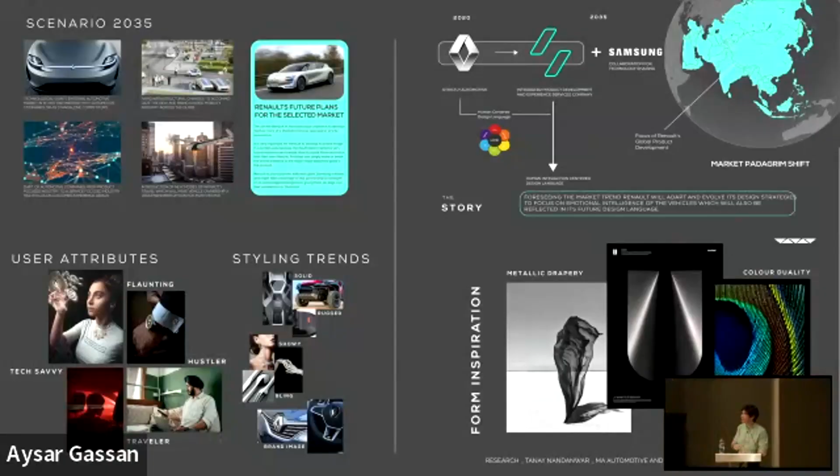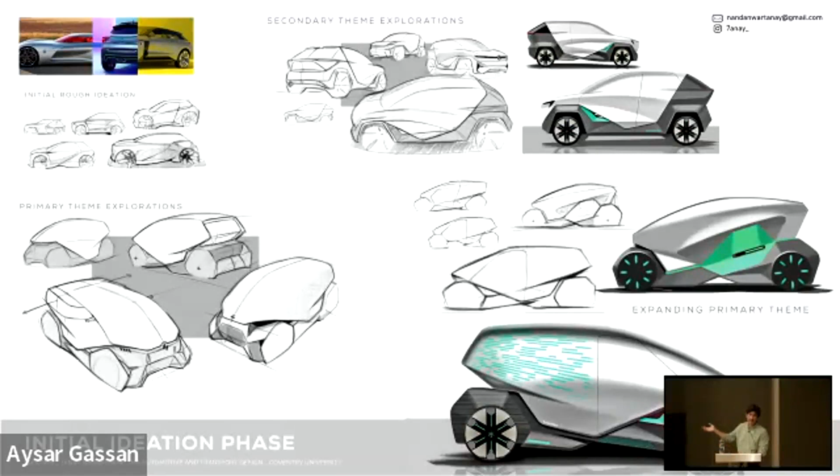Then developing those themes further, slightly more developed renders or illustrations, renderings we call them. A little bit more colour, a little bit more details associated with them. Some orthographic views, just really trying to hone the design a little bit more.

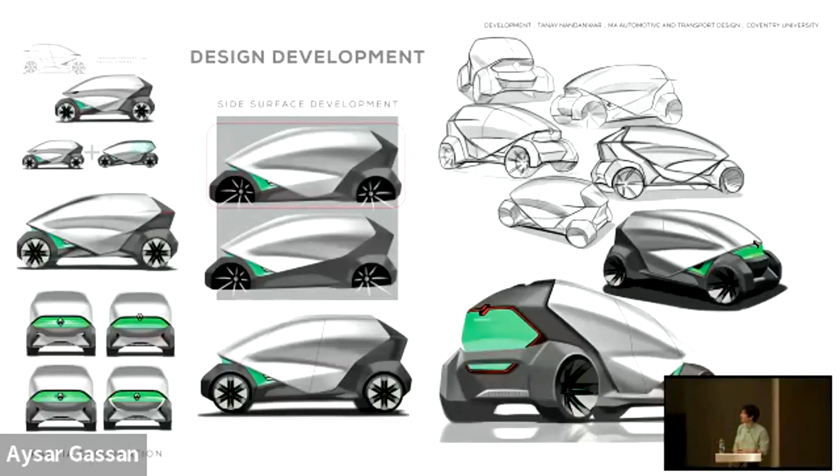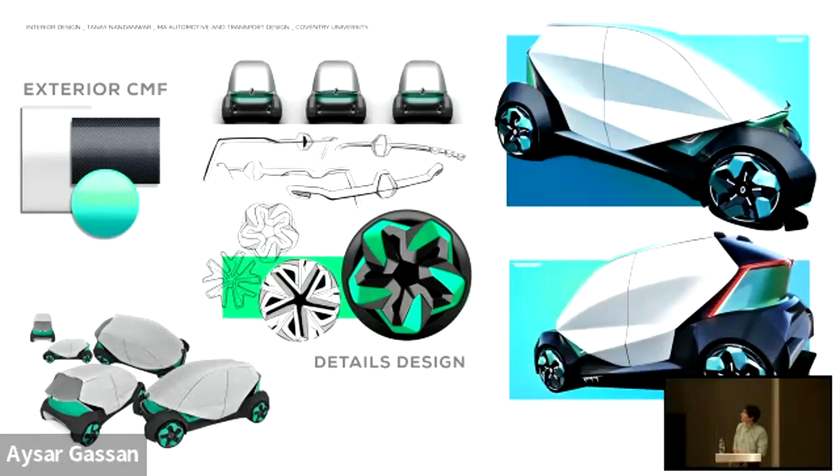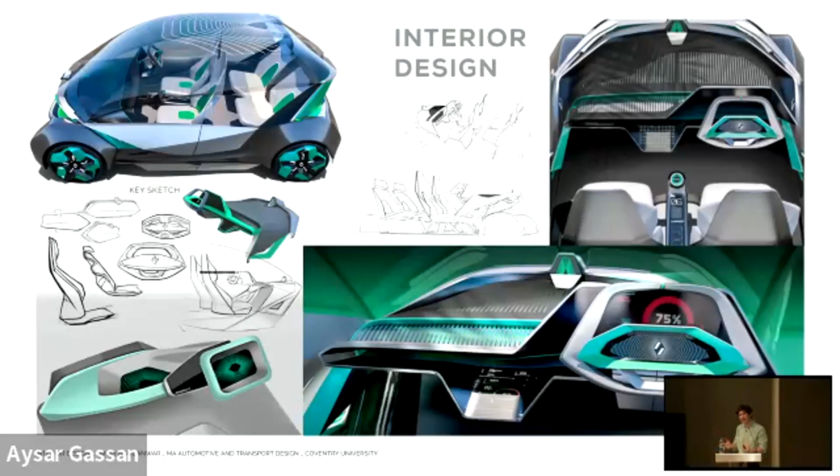Then some design details. Here we've got wheels. There's loads and loads of details, but just on this page, wheels. A little bit more complete renders with the wheels attached. Then some interior design, and there would have been a lot of work going into this interior. This is just a page, but there would have been hours and hours going into it to get to this stage. And this is a little bit of ergonomics work.

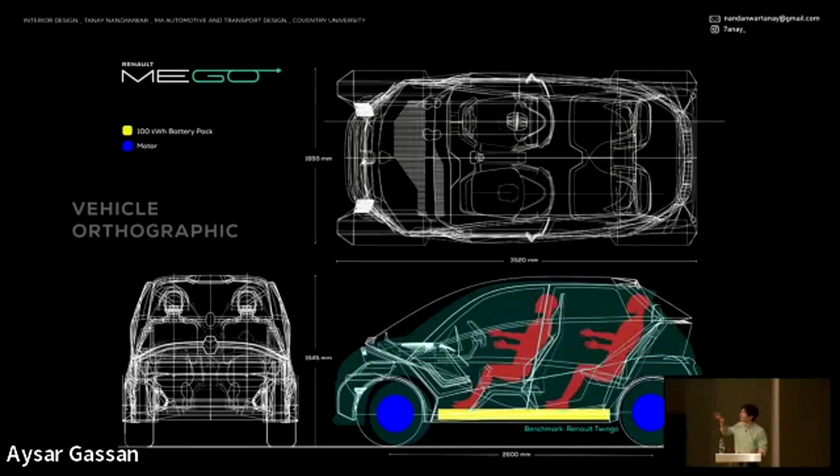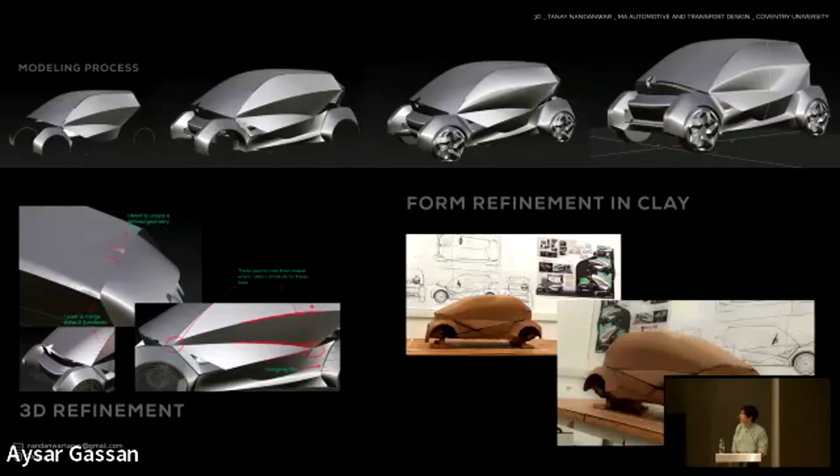And up here we've got CAD images, the development of CAD images, a little bit of clay work to kind of tease out some proportions with the clay, the automotive clay. And then jumping a step ahead, we've got some kind of photorealistic CAD work. So this is a CAD image rendered in a photorealistic scenario.

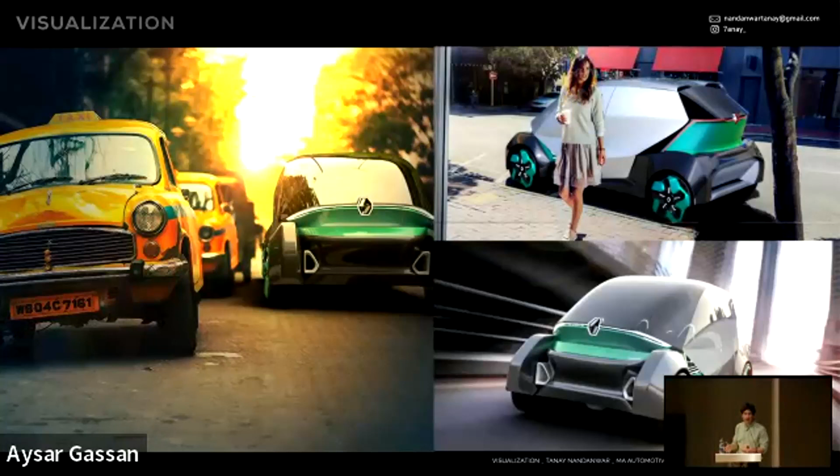And from there, we can see the vehicle in context, how it sits on the road, how it sits next to other vehicles, etc. And that's really important. It gives us a little bit of colour, a little bit of extra feeling to the illustration, to the rendering.

Another graduate, this is Tom Zier, and he's recently started working for a company called Ola, based in the Midlands. Well, they're actually an Indian company, but they've got a design studio in the Midlands. And he's here designing a race car. Again, starting with inspiration images, quite rough sketches, looking at a kind of a package, different views. Top view, we call it a plan view, the side view, etc.

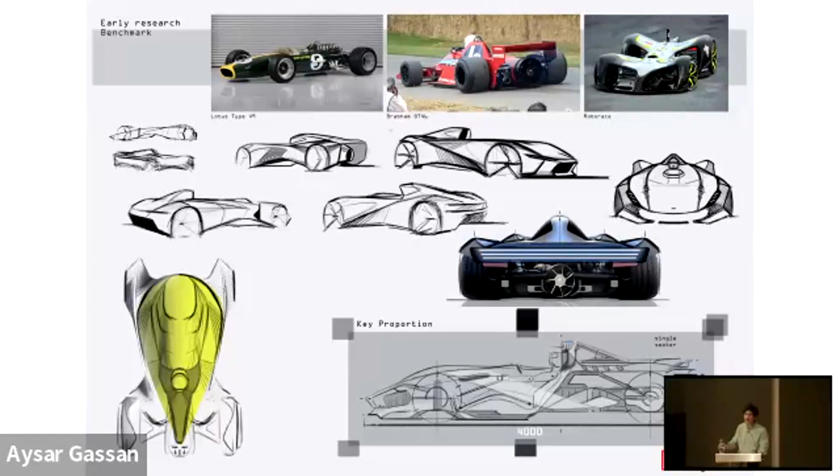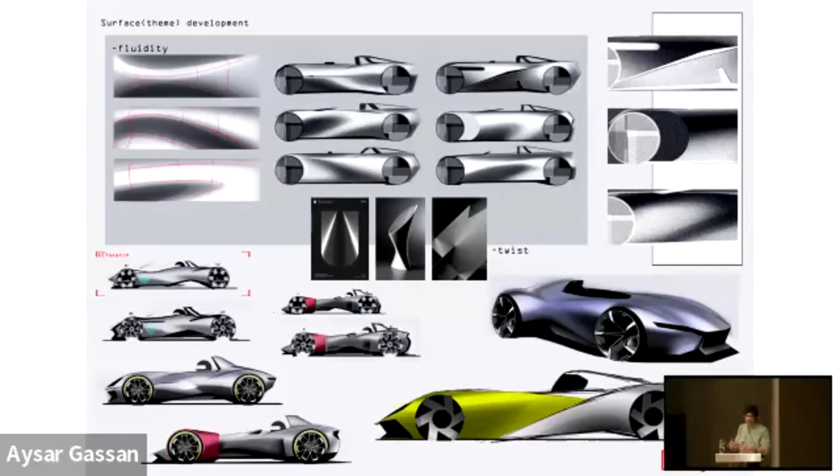Design directions, more side views, front three-quarter renderings, just trying to hone the design more, and looking at the shape and the proportions of the vehicle. Now here, Tom has gone into 3D CAD, and he's got his surfaces there.

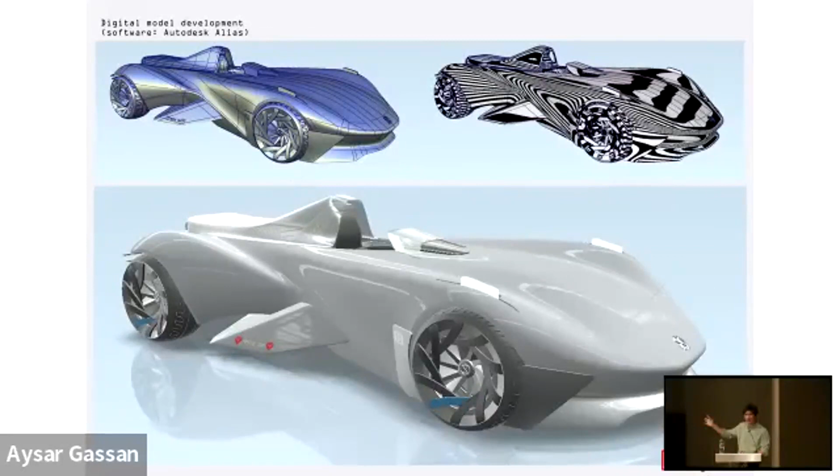He's inspecting his surfaces in the top left and right images, and there we're looking at how the reflections work, whether the design has curvature, which means that there's a smoothness, a slickness among the surfaces that allow the reflections to really flow. And then there's a sketch illustration, a sketch render at the bottom there. Then a little bit later, there's more developed renderings of this design.

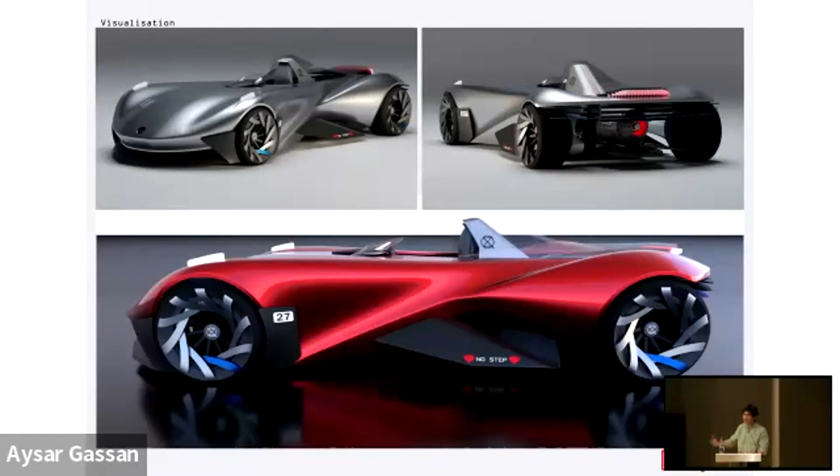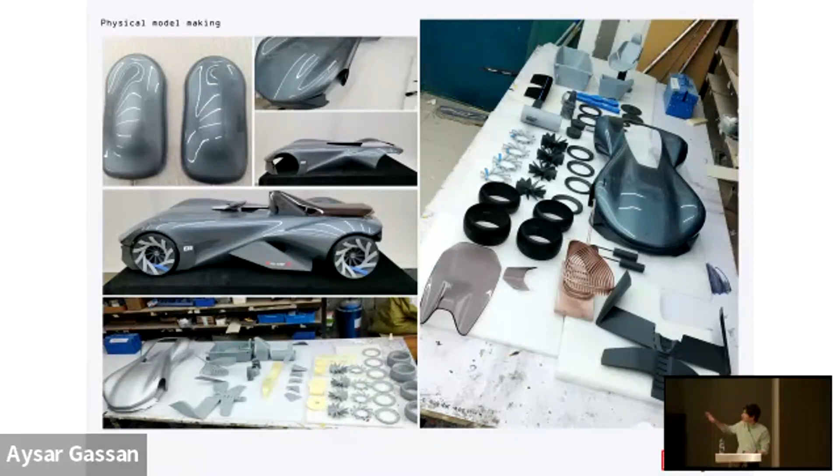So that's another young designer who's using this kind of process in order to get to their design result. Tom then used the data from the CAD file to prototype this design, the exterior, the detailing, and then put it all together, and there you've got the photos from the final design, which is really, really impressive.

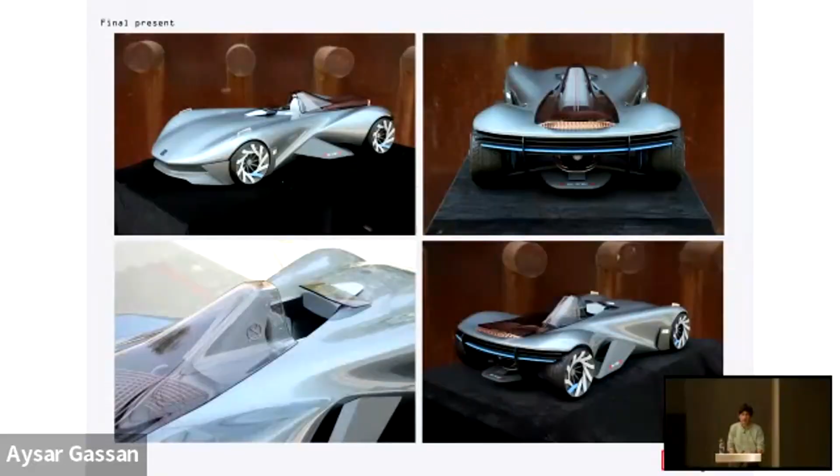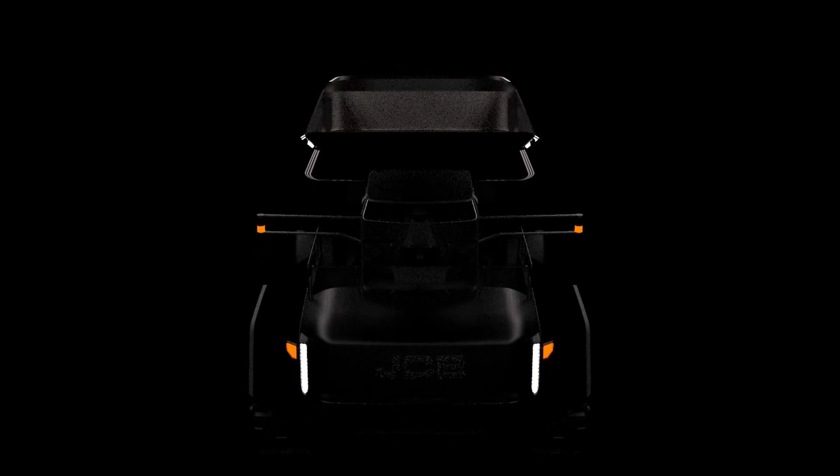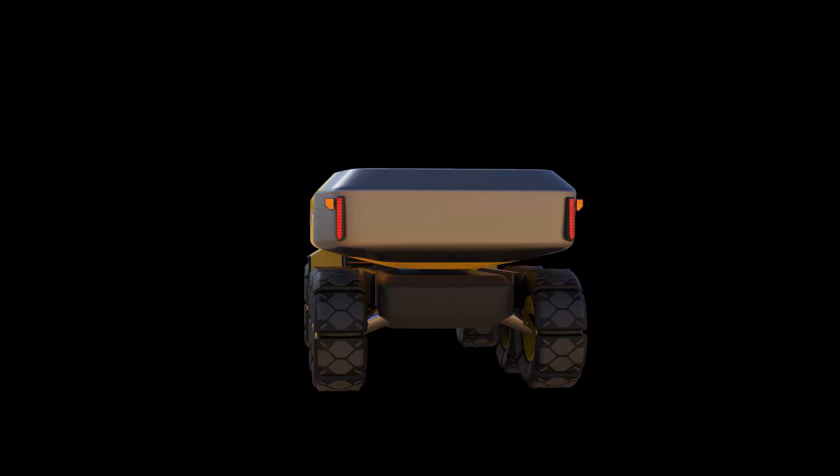So this is a 60-ton dump truck, and you can see the tipping action is shown here for the dump truck. Again, it takes a static design, and it gives us a little bit more realism associated with it.

Okay, so just to summarise for now, some of the careers that are available in automotive and transport design are user or market research, looking at the future, looking at demographics, looking at trends, and then exterior design, which is obviously the outside of the vehicle, the interior design, looking at component and detailing.

There are opportunities available for designers who solely specialise in detailing, like lighting, because lighting is so complicated now. It's so competitive. So there's opportunities available with lighting.

There's colour, material and finish designers, and they specialise in the types of materials that we find, often on the interior, and the colours and the fabrics and the different trim levels that we have, from more basic models to sport to luxury to more expensive models. Then there's digital interface designers, and they'll be looking at what we call the user interface of the digital screens in the vehicle.

So here you can see the beautiful timber floor, beautiful refined detailing, architectural roof. You can see how refined it is, beautiful lighting. So obviously there's no driver, so why not have a luxury experience in your vehicle, chatting away, reading a newspaper, perhaps purchasing some Bitcoin. Who knows what people will be doing. And you can see this going from a five-star hotel to the airport, etc. A contemporary of, but totally different to, the GAC Moca.

So if we move on to the final concept, which is the most recent concept, launched I believe earlier last month, the Citroën Oli. This concept rethinks mobility and looks at sustainability in terms of we've got loads, we consume loads, we throw away loads, and its strapline is enough, like enough is enough.

And how can we reuse, how can we slim down the amount of materials in a vehicle? How can we slow down? So this vehicle is limited, the speed is limited I think to either 58 or 68 miles per hour, I can't remember, but it's totally limited. It's about getting somewhere slowly. It's about really having a different experience and relationship with your vehicle than you do now, not hurrying around.

So this seat, for example, there's only three materials used in these seats to make them lighter, to make them easier to recycle. So some real thought leadership there from Citroën. So you can see the three different concepts, three very different concepts, but all looking at future ways that we might be using or interacting with, and relationships, debates, discussions with our cars. So some questions really in terms of where the future of mobility might take us.

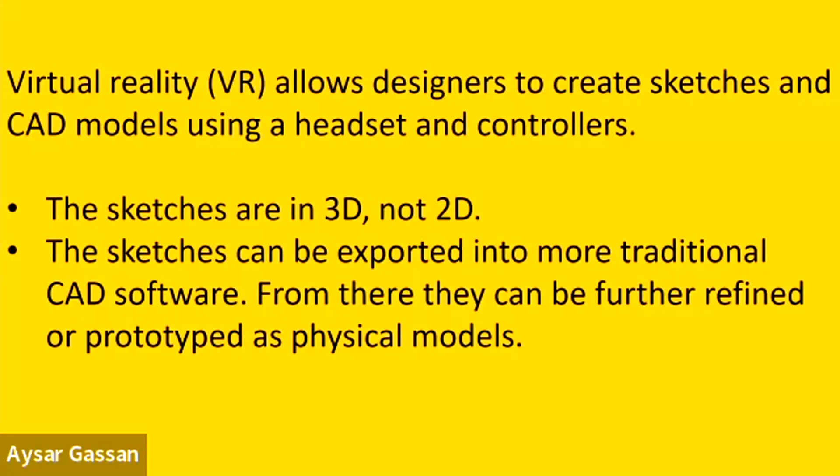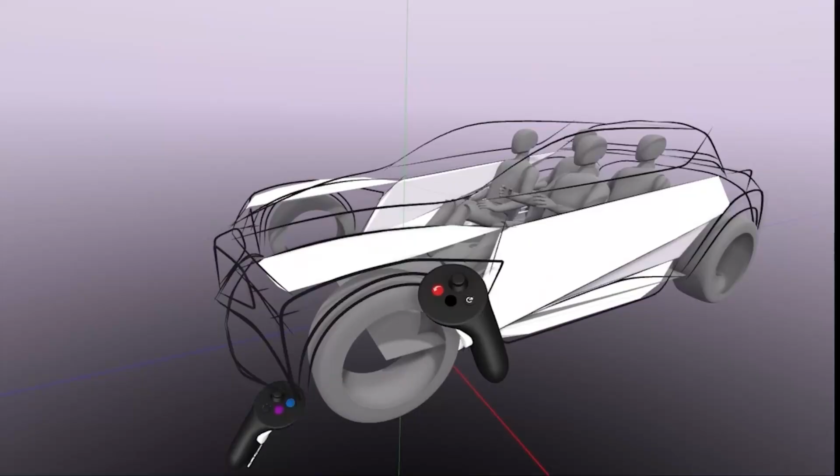Virtual reality allows us to sketch in 3D, so we can use a headset and controllers, and we're producing sketches that look like they're in 2D, but they're actually in 3D, and then we can go and prototype those sketches. So this is a friend of mine who works in VR, and he's created this little video for us of a vehicle. He's designing a vehicle in 3D. So you can take this vehicle that my friend's constructed, and you can go and prototype it, which is extraordinary.

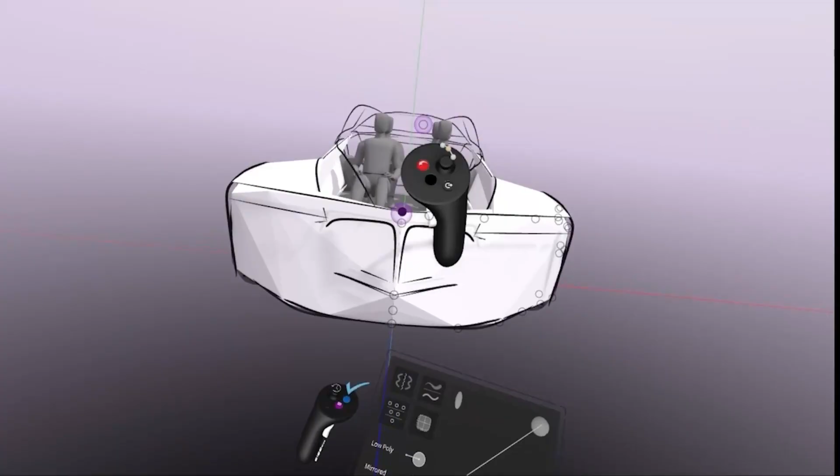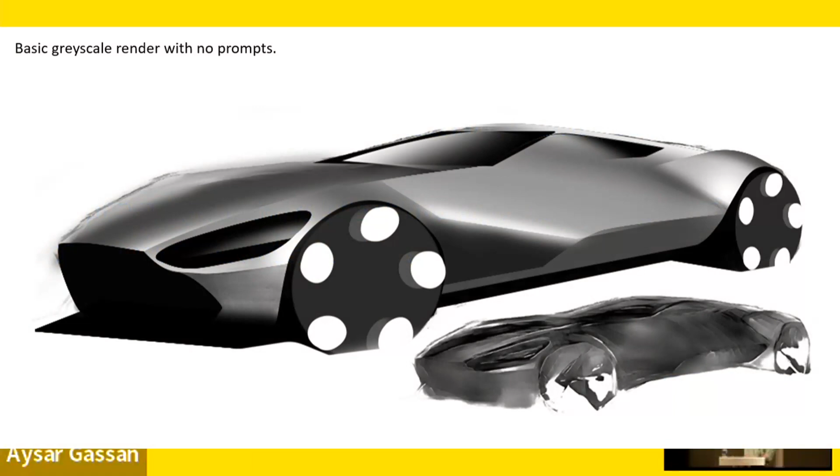Okay, I'm just going to talk very briefly about artificial intelligence, and that's, along with VR, a real future for automotive design. So AI is basically a computer creating original design for us, original artworks for us. And AI programs can use no prompts, text prompts, or image prompts to create designs for us. So on the right here, the small shot is an AI-produced image.

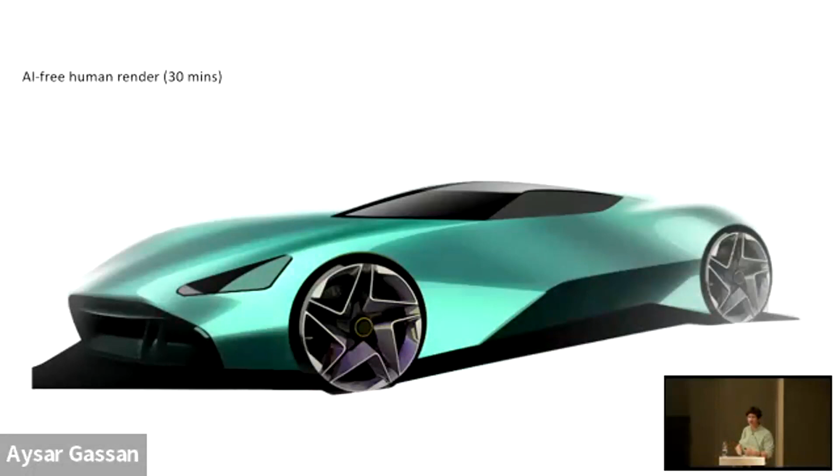Tom's here, who's one of the designers we featured earlier. He's created this rendering from that AI-produced image, and then a better rendering. So AI can be used as a kind of inspiration. And if you want to look up this video, it's really incredible, and it shows AI being used to a very different level, to quite a scary level actually, in terms of the potential that AI has. The potential is kind of bewildering, really.

So I'm just going to leave you by saying we've looked at these possibilities for design, or questions around automotive design. Finally, will cars, transport, products be designed by humans, or will they be designed by AI in the future?